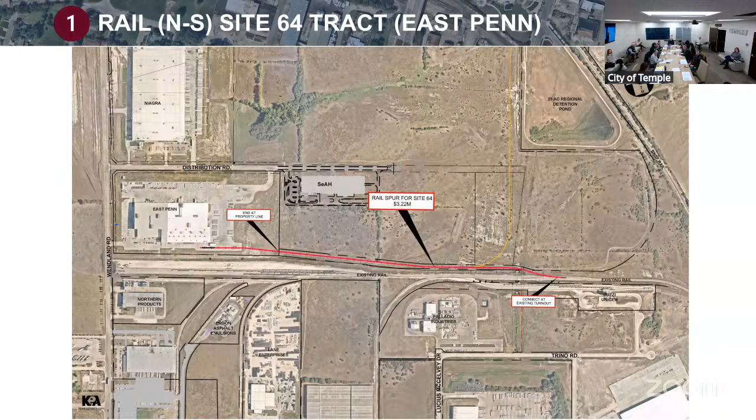We really just got that last week as we were trying to look through all the projects and find some additional money. So if you remember, 3.2 - it's actually 3.5, because the 308,000 goes with it. Yeah, so 3,528,200.

David, one thing as I was going through all these slides is that what we can use is, at the end of the slide, explaining the fact that it can be pushed out, so that when it's up here we can say that. So give me in red on each one of these as we go through, making sure.

I'm sorry, I was with my mother-in-law for her 90th birthday in Palm Springs for the last 8 days. I landed at 7:30 yesterday, and right now it's 5 in the morning, which can't be good at 7 in the morning. My brain is still in Palm Springs, which was 80 degrees when I left, and you're waking up to 15.

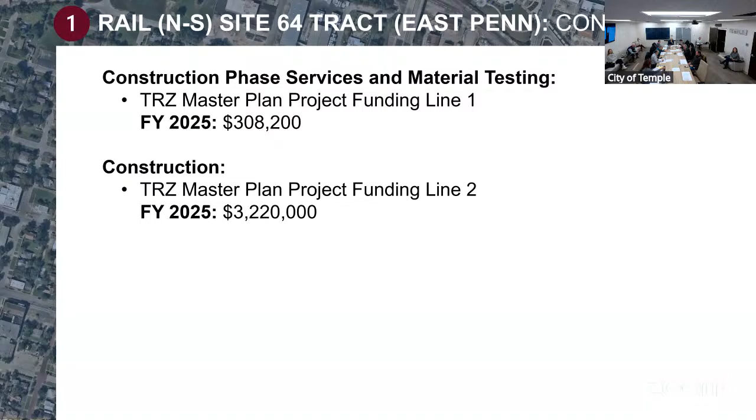That's not very fun. This is one big chunk of money that we really just found out about in our last TRZ planning meeting, which has helped free some dollars up, right? The master plan - we've been going through a bunch of this as a master planning group.

Another caveat, and I think most of us know about it, but in case you don't, is that there are multiple EDC land contracts currently on the table. So one of the things we're also looking at as a project group and a financing group, and want to present to the whole board, are some scenarios. If the land sales do go through, what projects would we want to have prepared to push forward.

As you know, one of the projects we currently have is this master plan. More importantly, in the master plan, the Old Howard is being moved and upgraded, and water and sewer into this project is being upgraded and prepared for the future. So that's also something we're going to be able to possibly complete.

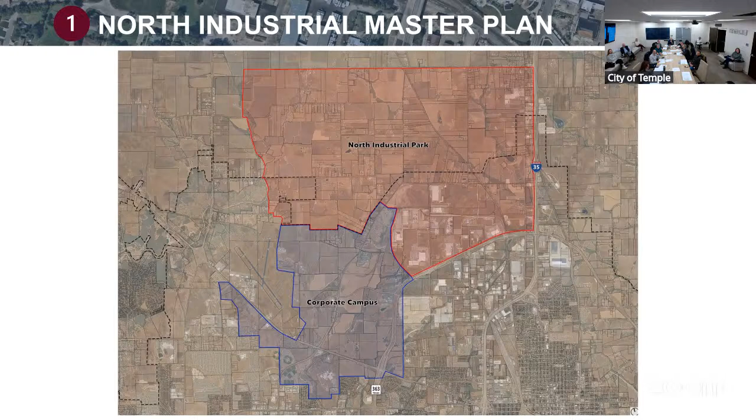Those are our two planning groups, bringing two of our zone groups together. It's important for everybody to see that we're looking at the orange or the red at the top as a planning area, doing a bunch of work in the master plan. We're really close to being able to make that full presentation, which I believe is an additional 25 slides. We didn't put them in here yet, but it's a very huge package that lays out what we're going to be doing.

The actual master plan is nearly complete. We made some adjustments to that master plan that I look forward to showing you all, just making sure we could possibly send this out to Patriot Rail to see if there's a possibility for them to get some grant funding for the N-S tracks.

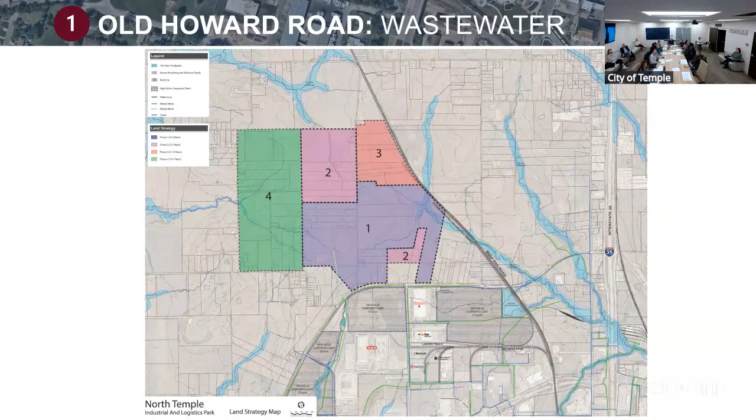Can we go back a slide or two? Right, so lines 33 through 36, which is Old Howard Road, water, wastewater, drainage. That's just that first green line, the first section, right? Yeah, okay. And there's two sets of slides here, and I've got to decide what's the best way to run through this.

This is actually just talking about a particular project, which was the master plan. When you get to those actual slides, it's nice for us to have a discussion so that when you get there, they begin to make sense. So here's the Old Howard wastewater within the master plan as we're pushing forward. This is just the wastewater portion of that project.

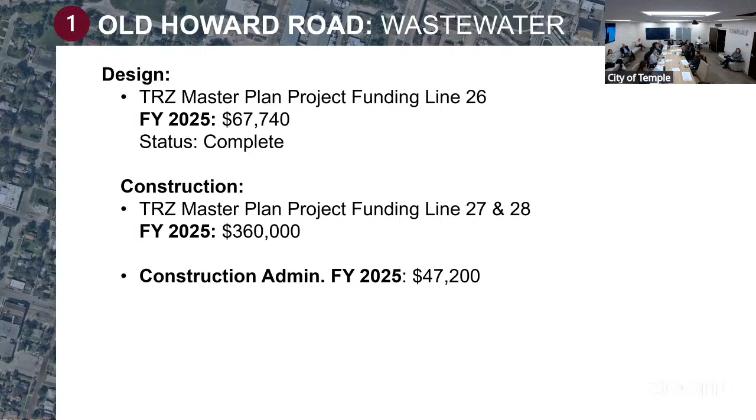But Gary, to your point, this is what is funded. That is what is in our project, and I believe we don't need any changes to it right now. The numbers are good, and so that's all we've designed is that.

In real terms, we have nearly all of the right of way available to push this all the way up to 1237. Again, that's important to know - we have a master plan, we know what we're going to do. We now have secured the land, and we've only designed the construction inspection dollars for this section.

But because of the amount of traffic we're going to put on this road, because of what's happening in this corridor, because of the really unsafe nature of Old Howard intersecting right at the tracks at 1237, we think it's important to try to release all the way out. This is the entryway of Old Howard.

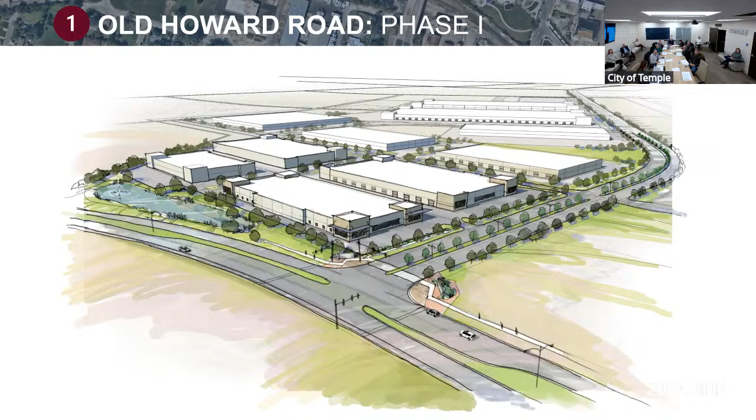We'd already made some adjustments to make sure we could do the landscaping, a nice entryway into this. That is the actual layout with some buildings in there, just to show everybody what could happen in that corridor - again, that's just another pitch. You were just talking yesterday at TEDC about the entrance and landscape, and that's programmed in. Yep.

This project's a $12 million project, 90% complete as far as our design. We're good to go on funding everything. All we gotta do is get the plans completed and push forward. I think 90% means it's in the city's hands. They're reviewing it, once they sign off, we'll do the 100% bid. Looking for a bid.

We're still waiting on Adrian to finish his deal to fund this. No, it would not change that, is my understanding, unless you guys have been doing something the last 8 days.

You can't talk about it. I think, I guess the question is, are we ready to roll? I think I would confirm with Adrian, but okay, keep going from there.

So if we're good, when would the bid date be? Where things are good, yeah, red at the bottom of this. I'll talk to Adrian, I had talked to him twice. Unless something literally has changed in the last 3 days, I think we're okay to bid, I think. Okay, but I would confirm with him before we...

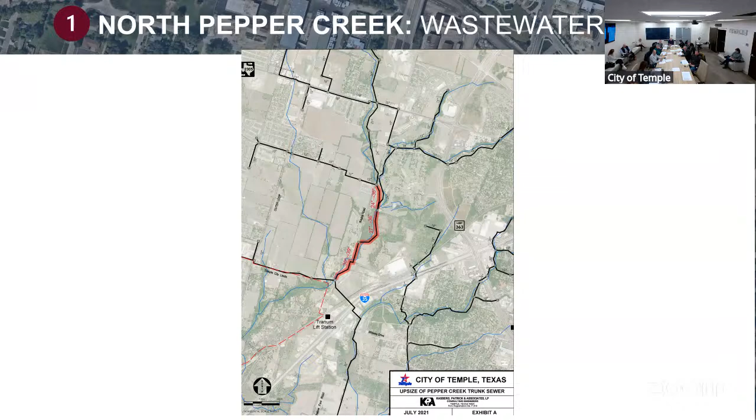Design's complete. We were ready to release this for Meta, and we found out that I guess Meta and Ocho both needed that wastewater. We don't need it currently, so we pulled the funding for construction to use in other areas, but we do have the plans, right-of-way, everything to do this project, and it is sitting on a shelf. It's very important for us to know it's sitting on a shelf - that is a choke point. We're going to upgrade that as soon as we really need it and have the dollars available, but it stays on our slides because it is something we're gonna need to do here fairly quickly.

A project that sort of jumped out at us is the sewer line requirements from, on the left side, Niagara - it goes to the railroad track, and then there's another section from the railroad track over to the lift station. This one, I had all kinds of questions on, I'm not sure we're gonna be able to answer them here.

The issue was that the current line there needs to be upsized. Bryn did a heck of a job pulling everybody together. I think a number of us in here were at the meeting. I think we have a roadmap to it. David Olson, I just saw these numbers like two days ago.

So the railroad, the Troy lift station, I don't remember us talking about that size of a number. I knew the one Niagara to the railroad, that was a number. I think the city staff absolutely has their hands around this project.

One of the things the city manager wanted to make sure of is that if we do this line for the third time, that it's the last time. So we're looking at all options to maximize the amount of wastewater that line will carry.

Niagara, if you remember, they were just going to do water. From them just doing water to where they are now, they put in two aseptic lines and probably will have a third. Therefore, there's considerably more wastewater, so we're going to have to upsize that line.

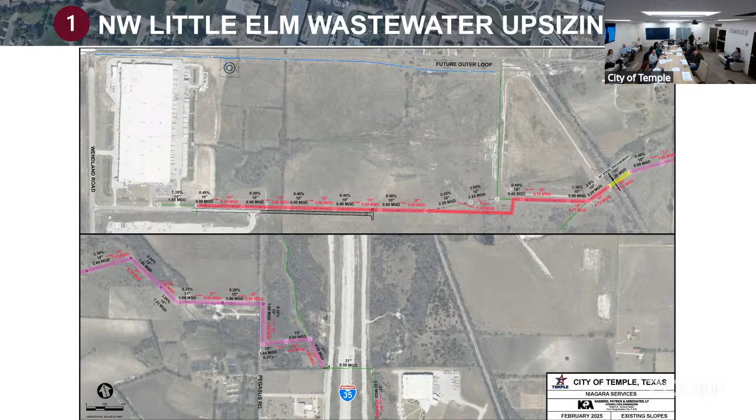64 and those branches, like the LEO 1 that's going up. Because everything, LEO 1, LEO 2, and this line all come together and go under I-35, so we're gonna have to get all of that capacity. Got it. Correct. That's what'll put you over the top.

Was line 44 still the correct number? Yes, currently. Okay, yeah. And that's our portion of the 3 million. You got city paying $1 million, zone paying $1 million, and Niagara paying $1 million. But we're gonna reimburse their $1 million, right? That's what current discussions are. So we're getting $1 million loan from Niagara, basically. Seems like an interesting way to do this.

Where's the reimbursement? I think the way everyone... Gary, I think the discussion is that if you look at the amount of increase that they have done, and they didn't know it, nobody knew it. They went from a water line to 4 lines out there, which we're delighted about, aren't we? And their investment and the dollars are returning back to us. We're doing a kabuki dance and thanking them. They're a great community partner. That's a great project.

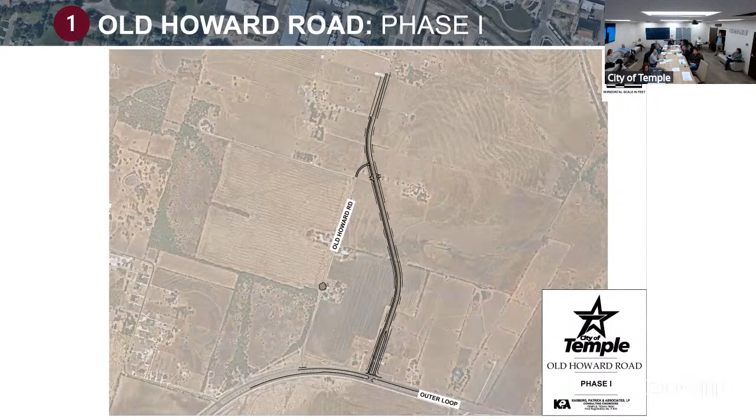This will be good, you guys, the 5.5 is an important zone project because the amount of capacity it gives us, if you go back for this project right here, that's LAO1's coming up into there. If we do a bunch up into this area, that's gonna drain into LAO1, and LAO1 and LAO2 are gonna push together to where all this water or fluid goes, see, they're all hooking into that, that's why, that's that one.

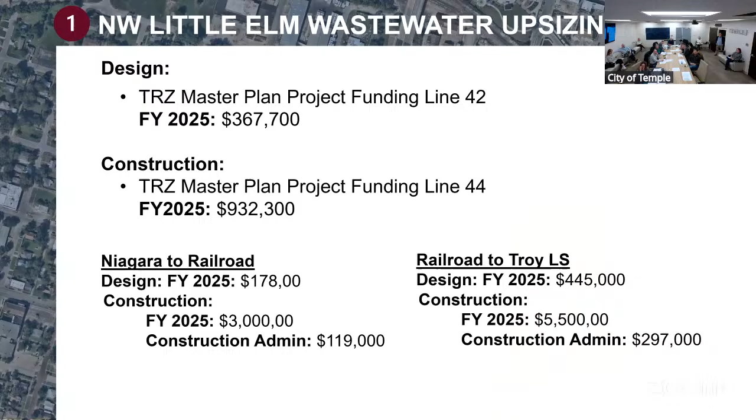Now we're moving to Crossroads master plan, not a bunch here, except that it's completed, and also it can be given in a presentation fairly quickly, you guys.

This Crossroads master plan has been slightly updated and is part of the North Industrial Park master plan. We'll probably try to get this sent to you guys to review, but we didn't add it all in because it's a considerable number of slides, crossroads.

But these are all projects that we've all seen and wondered, is there dollars for these? These contract amendments are usually us saying, can we add this kind of project? That's spending funding, we're still not funding it. It's a nice project to fund.

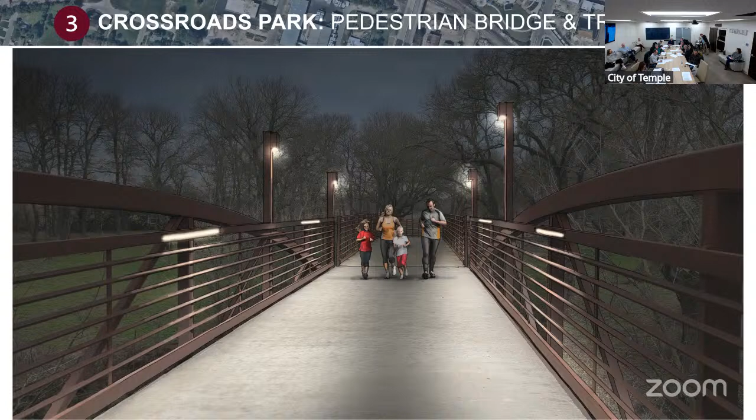We had it funded for 400 to just do one bridge on the Old Howard side, the outer loop side. We decided, let's go look at the whole project - what's it going to take from Old Howard over to the 2305? We went from our 400 to, I don't remember the number, 1.7 or 2.5. So we increased the amount of work, therefore we can't fund it. That's my opinion on that one.

This is we had a master plan for the crossroads. We've helped just do an update on what's a good thing to do with this tract of land.

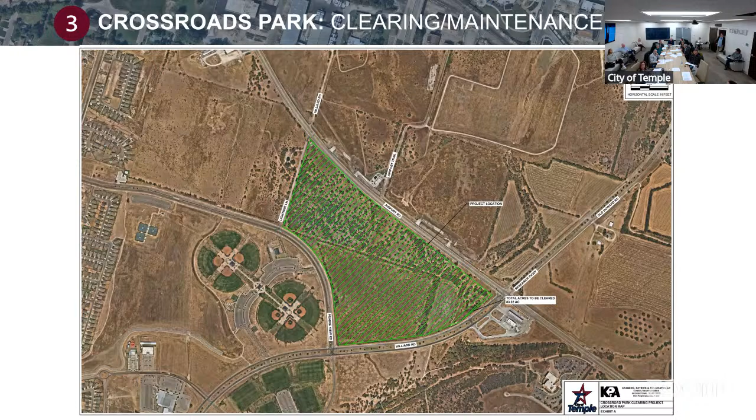Really what he's talking about here is that currently we need to open this up, or it needs to be brushed - there's a dump in there. What's the bid? It's already advertised, pre-bids today, we get bids in a month. Orange is heavy duty work, yellow is just getting mesquites out, and that's how it was presented so we can get this thing opened up.

We've got multiple people really looking at this, we've been in a couple meetings on it. I thought we might have had a slide in there showing what the potential is for this later on. Am I dreaming? You're dreaming, but I can add it - it's not in there yet. I'll stick it in after this, just to sort of show it, because it's part of the master plan on what we could do.

Are we clearing all the way to the corner? Where orange is heavy and yellow is light - so everything in the orange and yellow. But the corner, she's saying that's where we can't get in - all the floodplain. That's what gave us that.

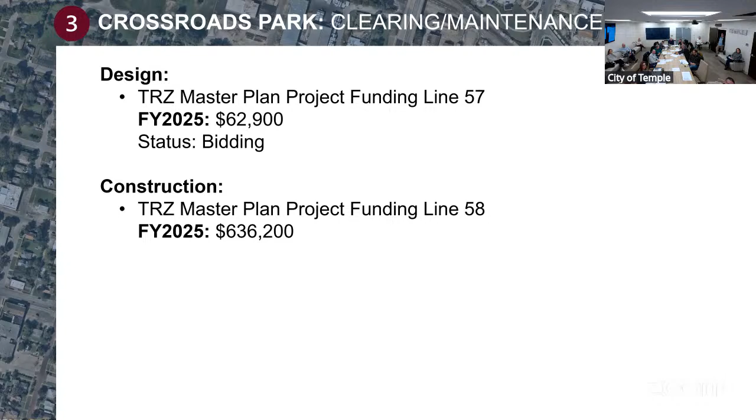Crossroads clearing, that's that project - you guys, nothing additional needed on that. David, why don't you take this one?

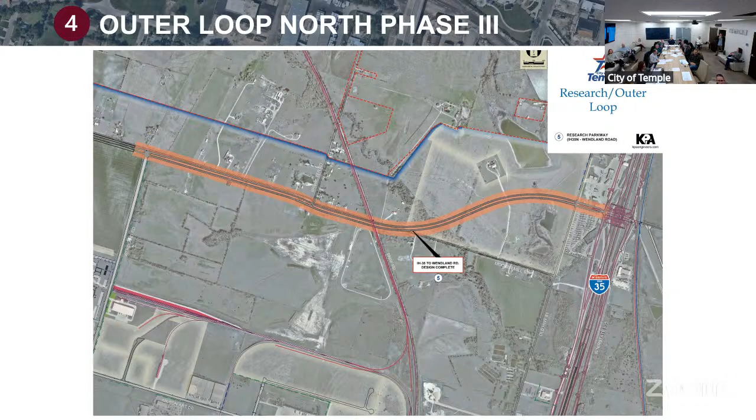Outer Loop North 3, some project we got rolling. This is the one - if you haven't been out there lately, we'll probably have a drone video pretty soon. It's going pretty well, especially on the west side. The bridge is going along quite nicely, piles going in, beams have been set on the west side across the railroad, and all the culverts on the west side are in. So west side's looking great, about to shift over to the east side of the railroad.

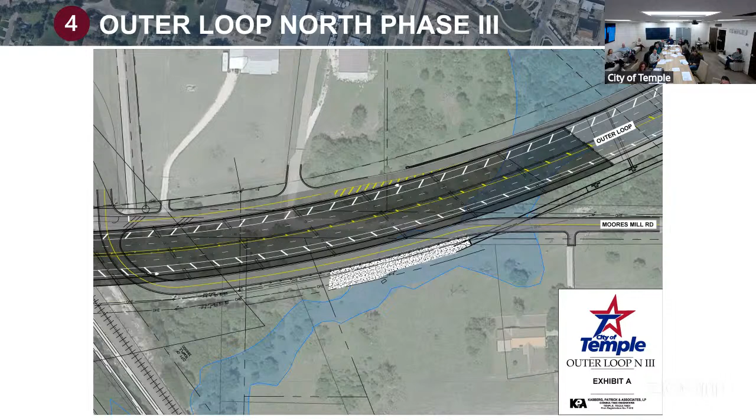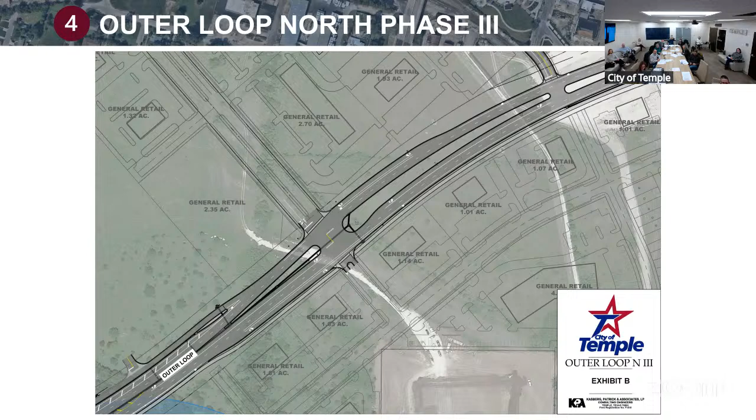As you recall, we did have some changes on there with the creation of the North Industrial Park Master Plan - good changes to this project that'll help us develop our land around this infrastructure and get us more increment out there. It was a considerable change order. Here's the exhibits illustrating retail and development that can occur once we implement the change order. And we do have a pretty good asset with that existing retention pond out there, and potential for a park in that area, so we're helping to create that and make those connections with the project.

Change order - this kind of gives you a high level look at that with the adjustments where we've got. We did have some dry utility complications and Pendleton waterline complications right there at the railroad.

With Meta, some very quick fiber optic lines were put in to feed that facility. We did get the plans for them and put them in our plans. When we started potholing, we found out they didn't really follow the plans. So instead of ripping out those fiber optic lines and shutting Meta down, we had to make adjustments on our set. So we've done that, and that's this change order.

We did make some adjustments at Brewster with the development of Site 40.

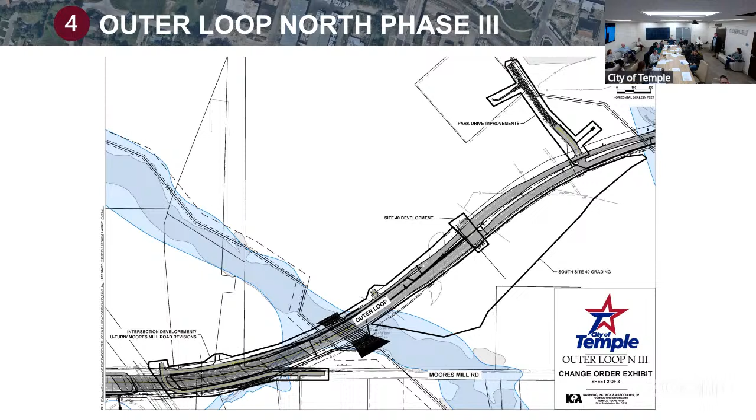On those fiber optics, that's all over town. Right in front of Crossroads right now, they don't really have to hand in plans or do anything, they just go out there and dip away. It's happening, they're contacting us on a bunch of it, and some of it we don't have things done yet. It's Meta, and Meta's literally telling them, put it in the ground. We got to rip it up and move it. We will do it, we'll pay for it.

Is that in TxDOT right of way that they're working, or ours? It's really ours. It's crazy because they can go through, this is wasting our time, but for having a Crossroads, they go through, dig everything up and leave piles of dirt everywhere. They don't put the sod back down. We go spend a bunch of money to make it look nice, and they just blow through and say, hey, we got the right of way, see you later.

So if we got change orders, are we asking them to pay for it? They have the rights, I don't know. Richard has his hand up.

Oh, hey Richard. Hey, good morning.

I just want to add that most of those fiber companies do submit a request to us for a public works permit, which we don't issue for work in the right of way by the franchise utilities. But we do review them to see where they're conflicting with our utilities and our capital improvement projects. And this one, they went through the right steps, they just didn't follow their own approved plans. But we do see them.

And that's, to Richard's point, not uncommon. A lot of times they'll coordinate with us, and whoever the entity is has done a set of plans, we've coordinated with the project, and then the contractor gets out there and they're usually before us. Something's in their way or it's deeper than they think, and they just kind of do whatever.

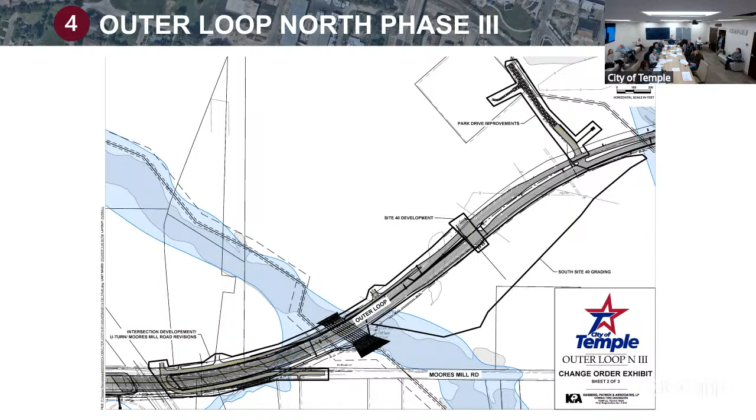With the QuickTrip development, we did have a few things that came in here, and some Pendleton water line adjustments. Those are included, as well as a water line extension that will go to the interstate and add a fire hydrant in, that was at the request of the fire marshal for QuickTrip, so we've added that in as well.

And then the change order amount is finalized, all of that. $3,520,000. What's your available funds for that?

We only had our last financing plan amendment, we had added a new estimate. So a proposed one, we would only add $241,717. When it comes time, so what's available and what we're asking for, so that we don't have to explain it in the amendment - this is the change order, but you have a certain amount of money.

Yeah, I mean, I guess, but we run out of contingency at that point. Right, so do we want to backfill it? We have worked some numbers where we would add $849,000 to the contingency.

Earlier I misspoke when I said it wiped out the contingency, but we would propose adding $849,000. So we're talking about adding 800 and not 200 - 200 for the additional change order, and then add 849 to the contingency, to give us a bumper.

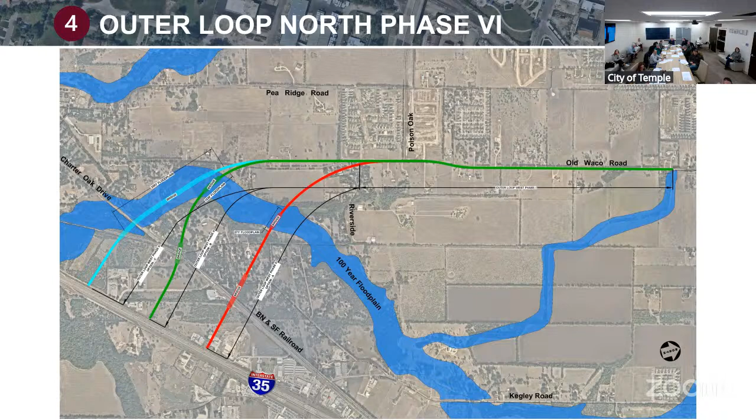Then it comes to this slide, and you're trying to figure out where we are as far as a zone. I thought we were right of way only on phase 6. Originally for 6, the zone was doing design and right of way. We've had some changes that will affect the cost and time significantly. Is any of that reflected in this slide?

Right now, our current number is 330, that's our current funding plan. With that current funding plan, is the project moving forward or dead in the water? I am currently rewriting a proposal based on the new scope of work and connection. In my opinion, this is a confusing slide, and nobody knows any of that yet.

At a high level, what's the— are you here until 9:30? No, I just wanted to make sure. You just whispered in my ear about pulling the parachute in about 15 minutes. So if we're not even going to get past slide 13, that's— are you here or not? I'm here.

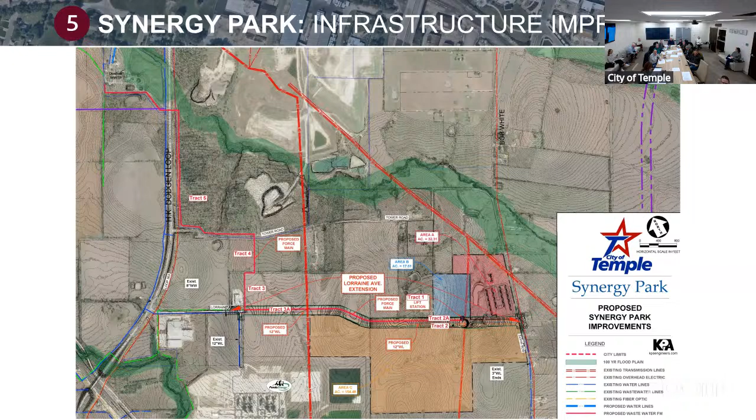This is some water line, currently under construction, started on the punch list. That means it's up and running, helping backfeed that whole area—Power Road transmission up to that lift, up to the elevated storage tank in the top left. That's a really important project to get water into that corridor. This transmission line—

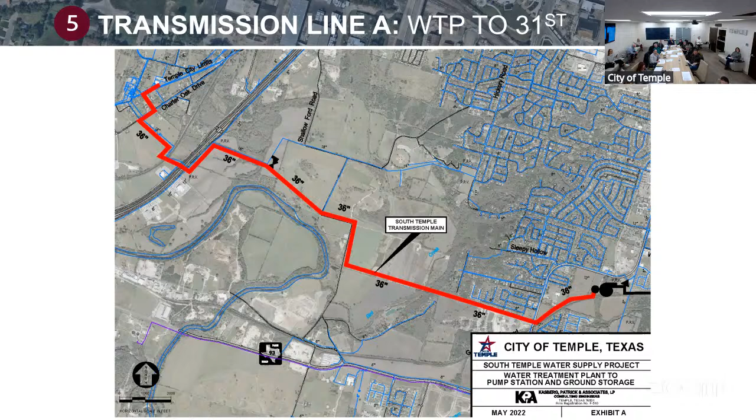I think this slide would be better to start with, David, than to start with the pieces. So I'm sorry, when I went through this one while you were talking about it—you should get rid of that first. Yeah, I think so. There's too many slides.

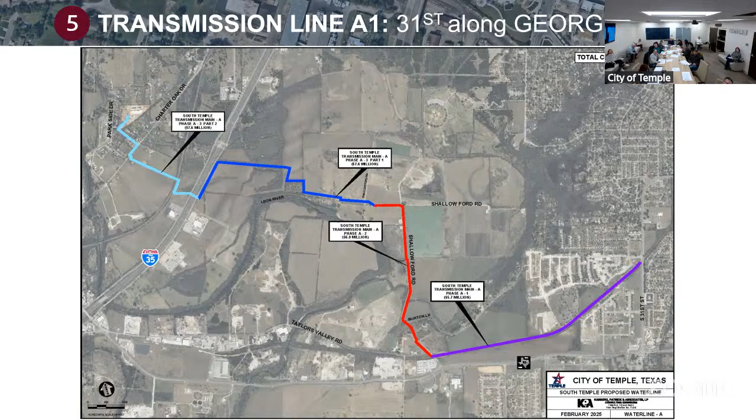We need to get the water from the left-hand side, the light blue—that's the water plant—to the right side, over to 31st Street. Let me check something out here, guys. I've got a lot of slides here.

So anyway, let me regroup on this project what we've got here. The purple is what we're going to try to release now. We're looking at the projects that are easiest to release so we can move forward. The blue line is the hardest. The light blue to the left is fairly easy because it parallels a current line.

So we walked ourselves through this. That blue line in the middle has probably got the most complex amount of right of way we've got to buy. The purple is all along the railroad. A good portion of that red doesn't require too much right of way, picks up maybe 1 or 2 pieces.

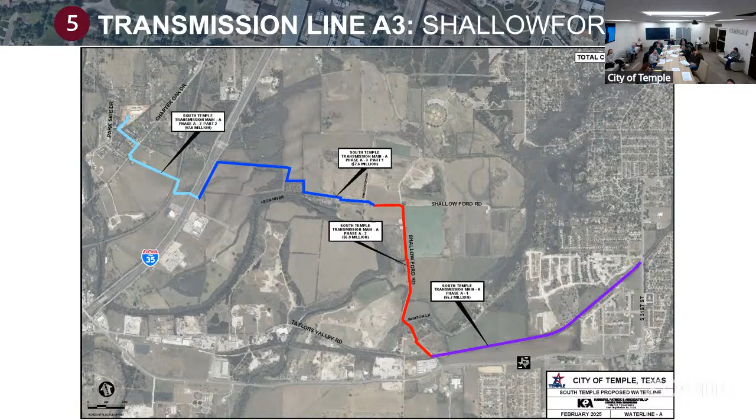So we can do purple and red fairly quickly. As the dollars become available from land sales, we're going to push forward on the purple and the red. While we're pushing forward on construction and buttoning up the purple and red, we're going to be working on getting the right of way to the blue so we can take that blue and then the light blue, attaching it into the plant. If we can get all of that in the ground, ready to go, you can then energize this pump station.

Which is along the piece that just got completed. We completed from 31st to 5th. It's been tested. It's in the ground, dry now, ready to go.

We pushed this ground storage tank and pump station off. If you remember, it was on our list to be done before all those other lines, but it makes no sense. That's one of the last things. You don't turn that pump station on until you can hook it into the elevated storage tank. So it'll be the last part of that.

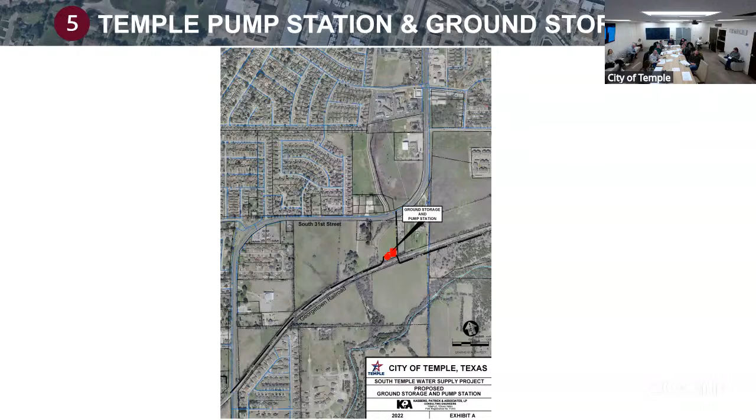I'm going to try to reorganize those slides to make that easier to explain and not go through each one of these. It would be nice to have a single slide that shows me the total lines rather than going through each one of these. A single slide would make it a lot easier for the discussion. Each one of these is multiple projects on our lines.

It's going to be real important for us in our February meeting. The important thing for the February meeting is to say, here's the whole line, here's the whole project. Red, purple, blue, pump station gets us to the elevated storage tank by '28, and we'll show you the funding lines on each one of those. And David's...

On each one of those, you can see FY25's design, so he is designing all of those to go get that water lines done. We'll blow through that, I'll make that easier for us, but I think everybody understands that. As you can see, some pretty big dollar amounts. But it'll make a lot more sense when they're all in a single slide rather than 12 slides for our purposes in February. Is everybody okay with that?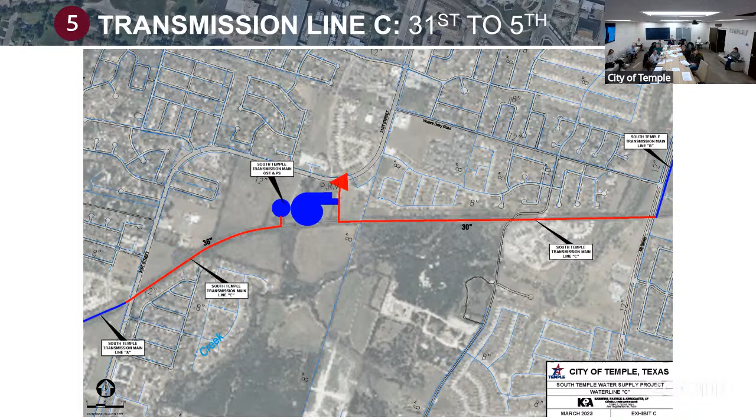You all understand this whole line, right? Pretty good, yeah, good.

So now you're back to here. Another slide. Yeah, this would be put in with that other slide.

That's why I was saying, a little bit of this, the water line, I'm gonna clean up for you, and the Lorraine Drive extension and what's happening in Synergy Park, I'll clean that up too. They're released, no change orders, nothing really needed right now for our February meeting, but I do want to be able to explain this to the full board in a little better way than what I am right now. There's just so many slides.

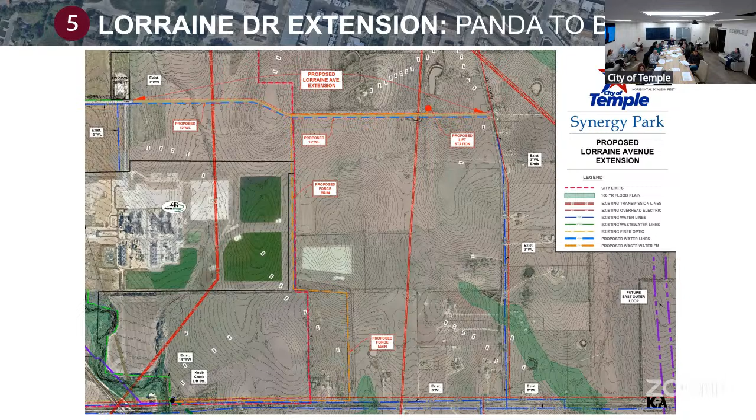When do we think Lorraine is gonna be done? Spring, yeah, spring of '25.

This is an important slide, but it's more - kill the other one, I guess, and just put it back. You got it, yeah, you got that. Yeah, this is the most important slide, that Lorraine's there. But we do want to explain, in Synergy Park, that the water line, the transmission's done, but he's put that in, put the water.

And so you're going back and forth in the conversation, which he does by funding line. But I want to be able to talk about Synergy all in one group. Yeah, I'll kill the first one, and I'll just keep this - right, yeah, that way you're talking about the whole project.

The Lorraine dollars, were those '25 or '24?

That's why I've been wondering, Tyler, about the 850 on the outer loop change order, versus being able to take those dollars and use them currently for the North Howard project, which I think is in here somewhere.

What you're saying is we got contingency money. Well, embedded in the projects. Yeah, we got money out there. Well, we also have $2 million dry powder too, right? If I'm reading this right - 2 million at the bottom.

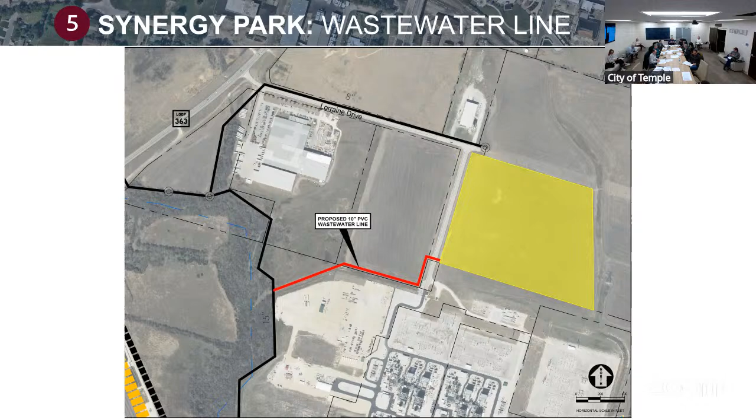You wanna show everybody what's in your financing plan and then say, okay, now let's get to the next slide saying here's what we could probably do. So then we have all these discussions that relate to the money, and then you get to it and say, now here's the money I still need.

This sewer line's going in, good deal, everything's there. You guys, this is a good slide. These are actually good slides. They even put that water line after it and that other one, right?

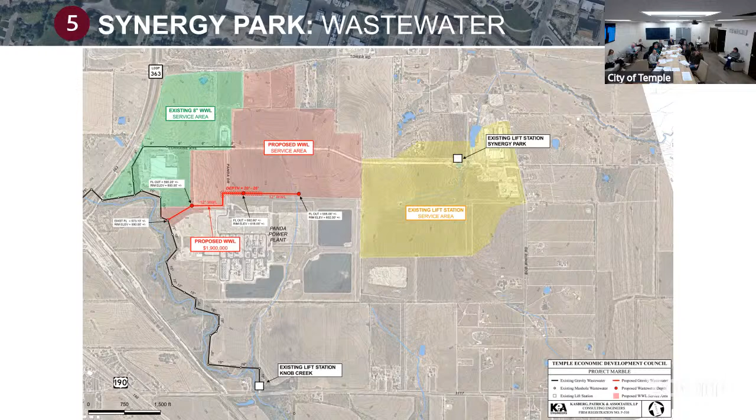It'll kill the first - kill that god-awful one that you can't really explain. This is the property, and this one could still be better as far as it shows what the sewer line services - the areas that are serviced. Well, not really, it does service...

Let's not talk about it. Synergy wastewater line, summer completion, under construction - that's a good project, needed. Downtown city center.

Man, I gotta tell you, my thought on this - I moved here in 1984. I have never in the whole time I've lived in the city of Temple come over the railroad and looked out on the horizon and seen all those lights on.

I've never seen that. I came up over and looked out there, you guys, and all of the Hawn lit up, and I thought, oh, I've never seen that - the whole top floor lit up. Have you seen it ever lit? I wasn't paying attention as I was driving over the bridge. Yeah, it looks pretty cool.

How do you - for me, I couldn't, you know, you look over that all those years. I mean, have you ever seen them lit before this? And you have? Probably. Yeah, we come down at night, but it's wonderful. Like when you're young enough to have seen them before.

Have you? Are you a Temple? I thought you meant - you've never seen it lit up before either. Not before now. Right, this is the first time you've ever seen it lit up, and been lit up in our life. I know, that's what I was wondering - who's seen it? Our generation.

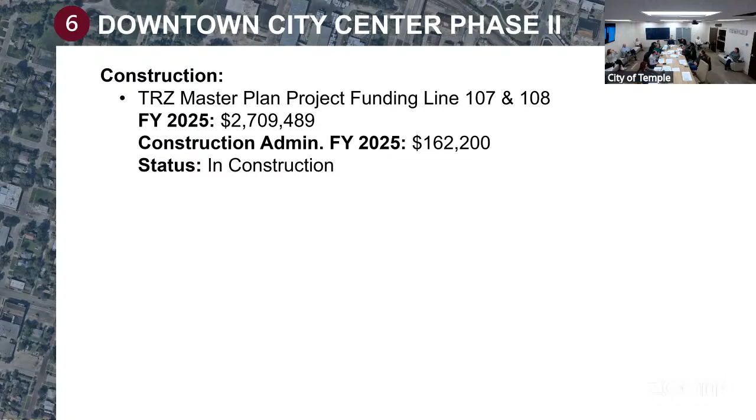It's crazy, lights, this is still working. Do we need any additional funds? Do you have enough money to finish this project, or the city, how are you feeling on it? That's actually going to be a Tracy project, but she's doing a great job - whenever we have a new phase, she magically finds money.

I saw that you guys contracted on one of the big yellow ones up there that you didn't have right away, so now you guys can go light that thing up too, maybe. And we're actively working on the second phase right now, or the final phase, and we're attacking it blocks at a time, and hoping that will work.

Really surprised that the one across from us here that's been redone, that's yellow, they don't... They came on board, that's good, that's an important one. This isn't - it's an old slide. Do you have an updated slide? I would need to check.

The question would be, do we need to talk about this at all? We say, hey, have you guys noticed that the lights are starting to pop up and it does look really good, and it makes you realize that any building lit is better than no building lit at the top. They look great, and that was the plan. We've actually gotten our communications and marketing team working with us, and they are making marketing materials that are being given to the outlying blocks, just so they can see, for those who haven't been down here.

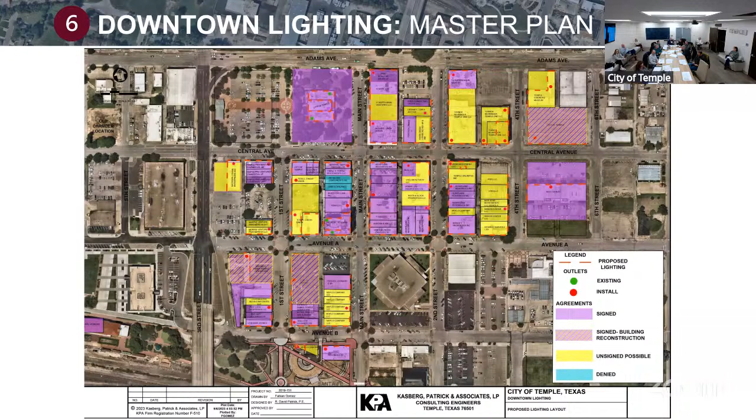You're still recording sessions? I'm okay, keep going with it. Keep going, just wanted part of the record. There you go. It's just so many things here.

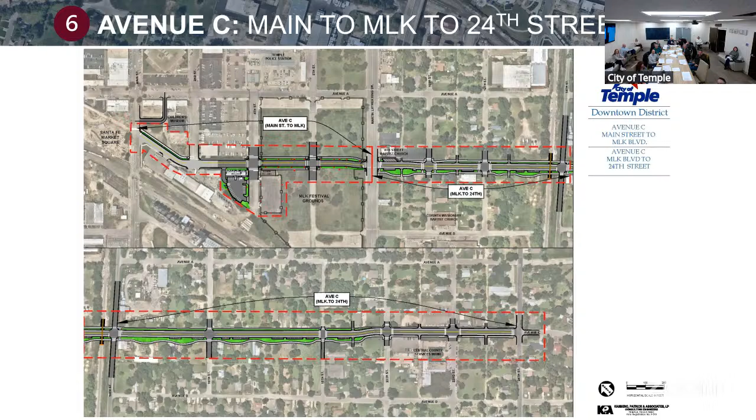Right of way purchases. This is, you can see these houses coming down and being cleared up. Do you have enough money for this? What do we have here?

Complete status. Main to MLK is completed, MLK to 24 in finance plan 2028. That's our construction dollars for 2028. Yes.

That was, if it's in 2028, we'll just get through it. C to Central.

This is a project that is coming up fairly quickly, 2.8, 2027. These are some of the projects that got pushed.

This thing's been ready to go. Matter of fact, this would be one of those that if some of the land closings come through, I think you'd push it back up, right? You guys, the design's done. This project is ready to push.

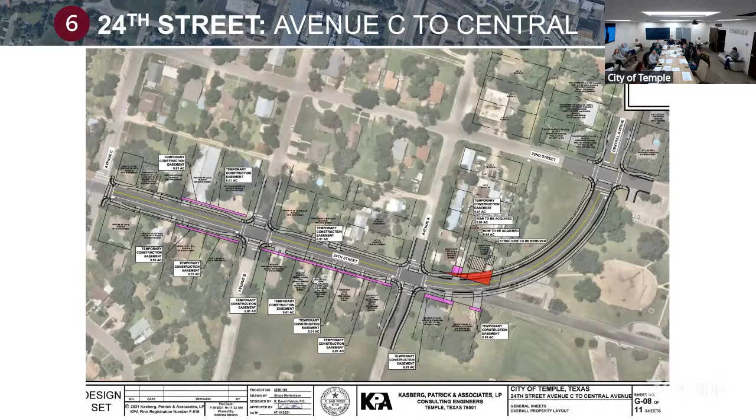We push the... back up one, or forward one or back up? Right there. What'd you say right there? Yeah, what you got?

Okay, I'm good. But I was thinking this is one that is really one of the projects on the east side that we should, you know, it's been ready to go. It would be nice to get it going.

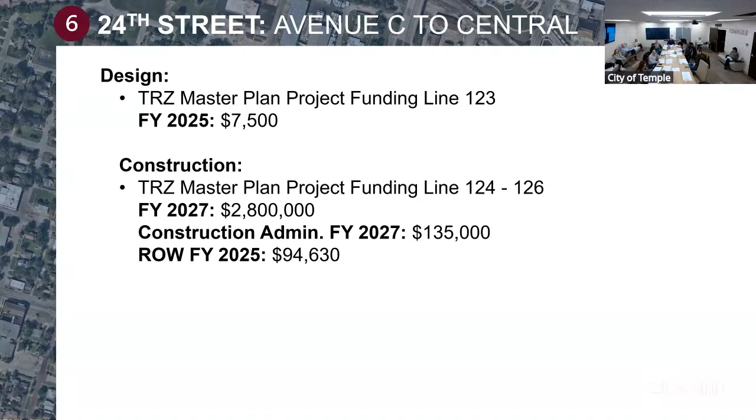This is Henderson. We were buying right of way for that. It's on hold from us as far as any construction dollars. So I don't know, I think Brendan picked some of that up in the city budget, right?

You write down, put 30% schematic, that's all we had up here. That's what we were doing. Because we didn't have to do right of way, we got it purchased or... there's a ton of right of way needed for this. All we were doing is trying to get them a layout for that particular project.

And we had a 30%, now I remember 30% said that if you could save more land in there, so that when it comes up, what we had decided is just to get this yellow line put on the ground and begin the process of understanding what it would take to do this.

I thought it got redesigned. You did, and it didn't necessarily eliminate it. Is this the redesign? I don't think so, we've all slept since that. Make sure you have a current layout. If not, at least put it on there.

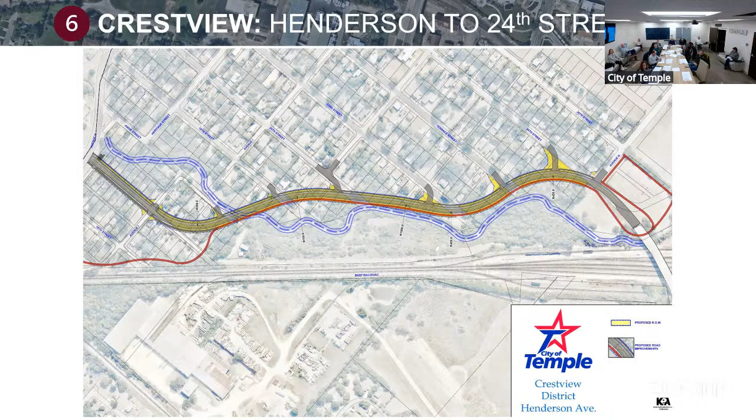Now, like Steve said, this is a game changer for that whole area. If you had multiple purchases in 6 months and you were looking at all of the projects across the radar screen, which is what the rest of these slides begin to do, it's to say where would the dollars be spent. So this is a project that is ready to bid.

We're trying to push David to get an okay from the railway. He was waiting for TxDOT approval complete before he pushed to the rail. So this thing is ready to go, we're just waiting on the final sign-offs from TxDOT and BNSF. The city's gonna just push. The school district just approved their GMP for all that work over there, so we've got all that funded. Yeah, this is funded, and it's ready to go.

But it's not going - either David comes back and says we're all ready to go, but we're really not, that's not solid. We got all this money and we're ready to go, but it's gonna take 8 more months for us to get it. We shouldn't have all these dollars sitting on the table, so this thing needs to release in the next month or so. If not, we need to push it. $5 million, yeah.

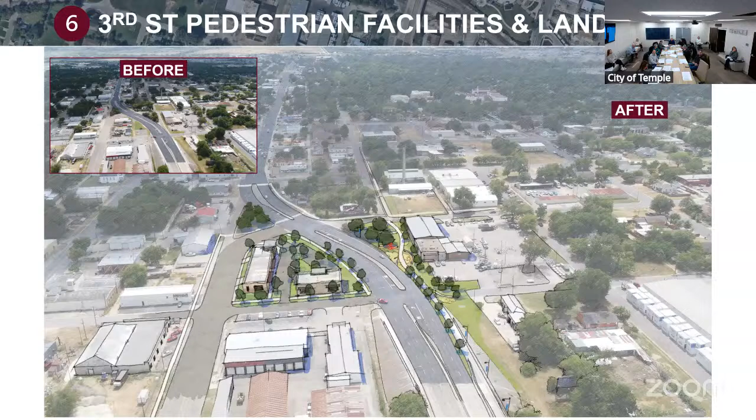So somewhere in here it says this is what they've released for their project, that's what it looks like. We were trying to make sure we were ready. David has asked the question, well, should we split this into the city portion, this piece? We could break that off so it coincides with TISD. Then this portion of the project pushed with the approvals for TxDOT - in my opinion, this should be ready to go. It's been on the radar screen, this thing needs to be ready to go.

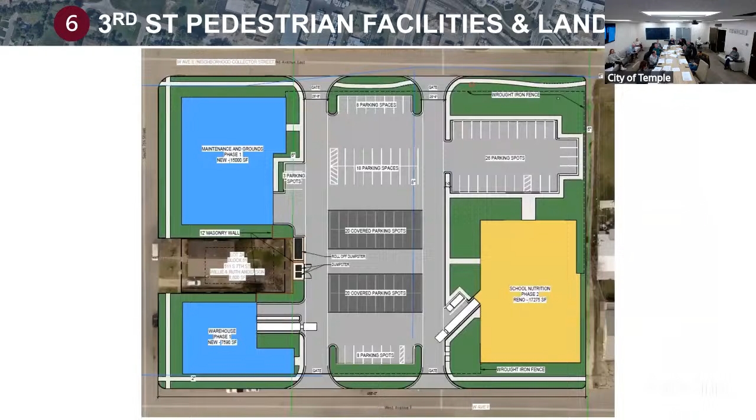So you're saying that's 2 projects, or this is one? This is a single project, all of this is in this project, but you could phase it. Because that's an on-system spur 290 roadway for TxDOT, much like we're doing at Veterans Memorial and jumping through those hoops and changing plans daily, you'd eliminate that for Avenue E, because it doesn't make sense - for Avenue E we had no control over that.

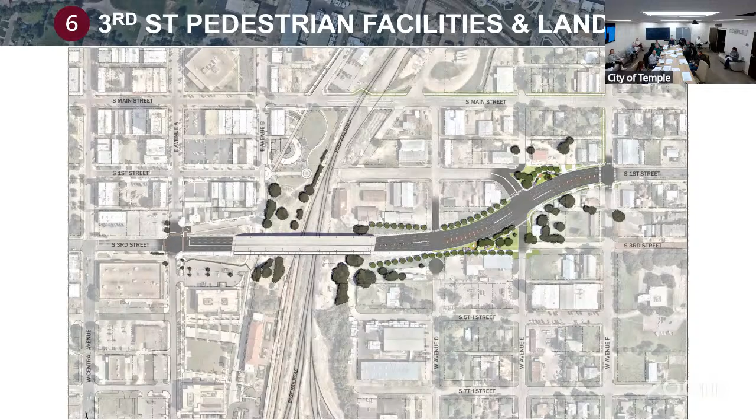And that was just a question - it's all the same, it just needs to be pushed through. We could easily break that out, just do Avenue E and take all TxDOT purview away from that piece. I'd like to get it all done - start with the process of just saying, what does it take to get this thing released in the next month and a half? We got the money, the plans are done, what's it take to get these 2 people to say yes?

It's so easy to just say let's push this back another 6 months because we're not gonna focus on it. The city manager and all of us, we need to get this done, it's been on our radar screen for a year. That's my opinion on this project, it's frustrating. This thing should be ready to go, dollars are there, TxDOT and BNSF, that's what we're in coordination with.

If this project needs to be relooked at, it won't be for February, but - who, Richard? Jason, he's working with Jason on TxDOT on it. Good morning.

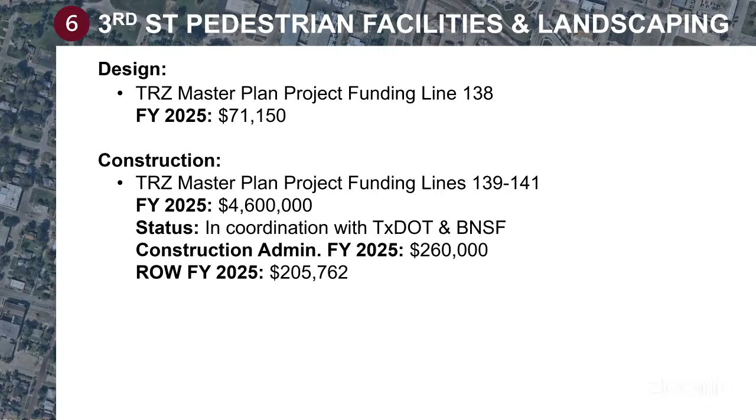Hey, just to let you know on that project, we have a resolution going to council at the next meeting for what they call the local on-system agreement, which is TxDOT allowing us to spend our money on their road. So that's one hurdle moving forward. Great, so we won't be readjusting this now - let's just get BNSF to sign off on it. That's David Patrick's show, I'll let him fight with the railroad. We are fighting with the railroad. When did they get it? We need to just be pushing forward on it.

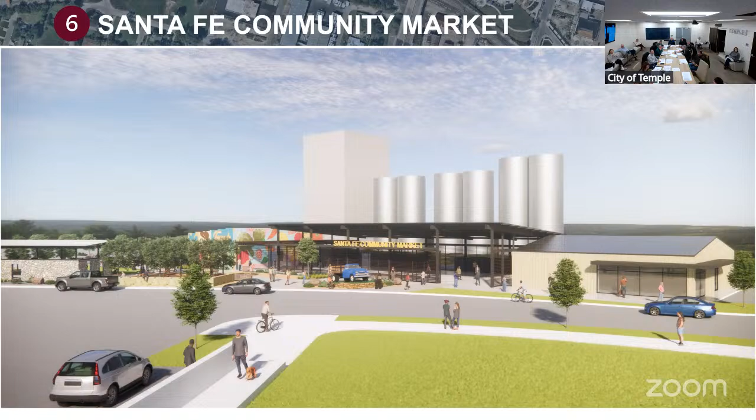This is a good project under construction. You can see it's sort of a moving target, but it's now really nice and cleaned up. This is the newly adjusted version. There's been some changes, as you know, to that performance building, and I believe this is what it is now.

That's not gonna look like that anymore. He has the new one. Remind everybody of the previous, and then we'll show the new. Oh, you got the new slide in there? Yeah, that was the previous one. There's the new one.

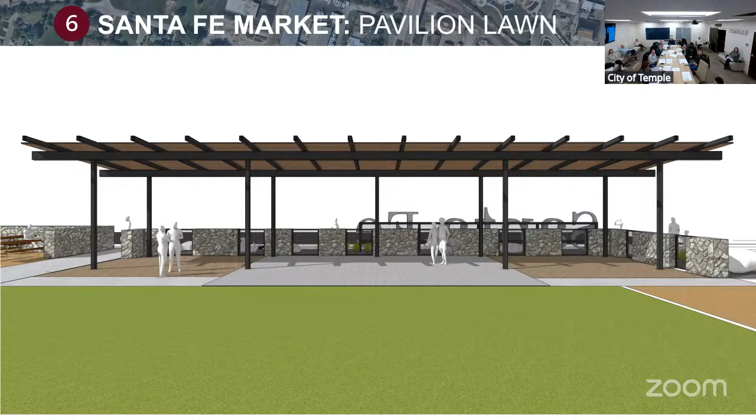Does that match the new one? No, that's the old one, just so I remember, the short one. We've lowered this, there was no foundation under that, so that was one of the work in progresses.

There are some letters that they found that they're gonna put in, that's part of the project. If you look in the background where the mural is, we do have that in the project.

That wall, we gotta make sure that they are doing as much as they can. It's a pretty big dollar amount we're spending to paint that. Let's make sure there's no scope issue on that wall, David, I don't believe. In my opinion, understanding that, you're talking to the contractor, but that's a pretty expensive mural to be put on a wall that isn't scoped out at all. So we either need to drop the mural or add some dollars to make sure that when you spend $60,000 on a mural, it's on a wall that has been properly prepped.

I think it's 40,000. We spent 6 on the one at our yard, and it's pretty big. Yes. That seems like a really high ticket.

I would say that needs to be analyzed at the project group level. When I talked to your group, we've gone and walked it. I talked to the architect, and the architect said yeah, we do want the little seat below, that square is there, you can see the door's still there, they still want it to look like it's on there. I said, so are you prepping it all, like power washing, scraping, and texturing, making sure it doesn't peel off in the first week?

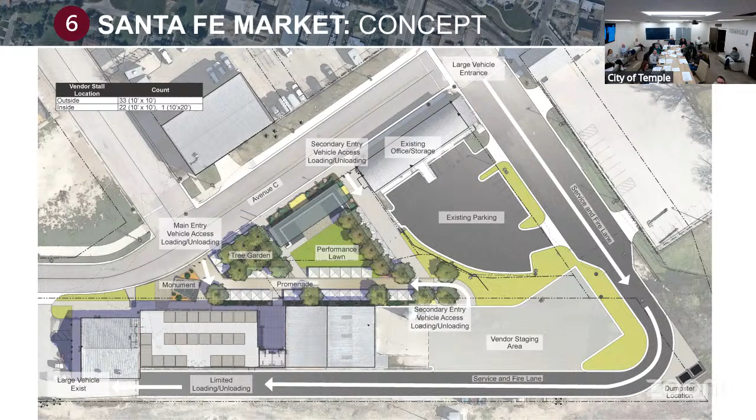Those are all kinds of thoughts, you guys, that we've talked about. The key is we're gonna have to do the roof, and that is gonna open and activate that building for storage. That's one of the deals.

The other one is, do you have the change order on here, David? I don't know, are we not having a vote on it? We have adding 450,000 for both to cover. Meeting's over, Chairman Strickland.

The drainage change order will be on your agenda for the next meeting. It's dated around 140-150, but I'll add it. That one needs to be on the agenda.

I'll add it. I'm starting to figure out how I'd make that presentation. We're going to talk about how this works - I need a slide that shows a picture of what we're doing. There are two items that need to be done on this: the roof, and I'll explain why we're doing the roof more briefly than before.

The other item is what they found underground. We had a nice inlet there for drainage, but as they opened it up, they found out the conveyance system for that inlet was all done with railroad ties from the old days - they ran the pipes along railroad ties. So there are two change orders, the roof and that, coming in around 160 and 250.

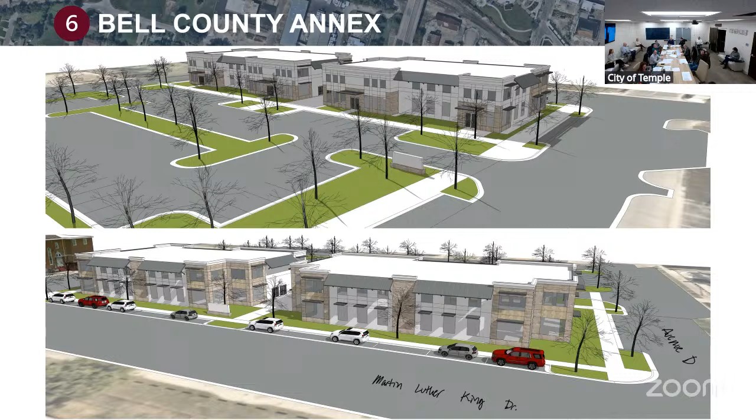You go through the whole story that they changed on the county level. It used to be that there was a single vote, it's real important, now it's a two vote system. And that's why Colleen's taking so long. That's what had happened. It used to be the person's district that made the change.

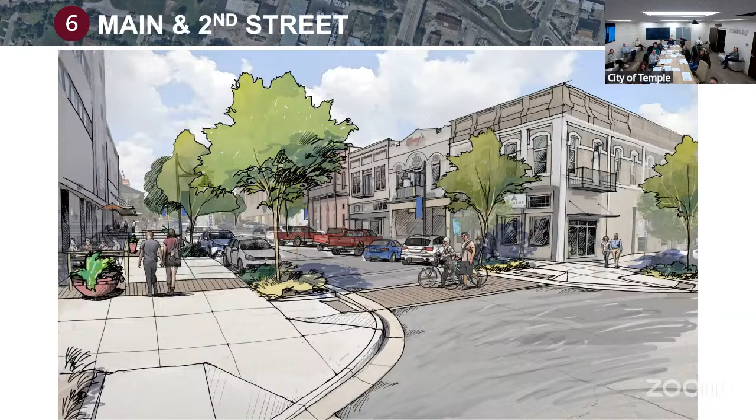This is the whole Avenue A corridor, Main Street, Second and Fourth. Let's see, you show Fourth and then you do not. Yeah, I've never really liked it. It didn't get in there. Not labeled, it doesn't show the same tree layout. Why it didn't put to there.

The important thing on this is that the actual design is completely funded. He is working on this. Design part of Fourth Central Avenue is being broken out as a separate project.

Does it show it? Do I have that as a separate project? So what you're telling me right now is that this Fourth isn't a part of that 360? It is, absolutely, yeah, I don't have Fourth. You told me 45 days and I'm just making sure I understand what this means. Design is in progress, yeah, so design is still in progress on Fourth?

There's no slide in this presentation that explains that, right? There is not, that's my point. It's not, I can't use this, right? Okay. When we're back at Central on that, I can't explain it in that project, so my point is that I want to be able to tell the story you just told me. Gotcha, you don't have it in here.

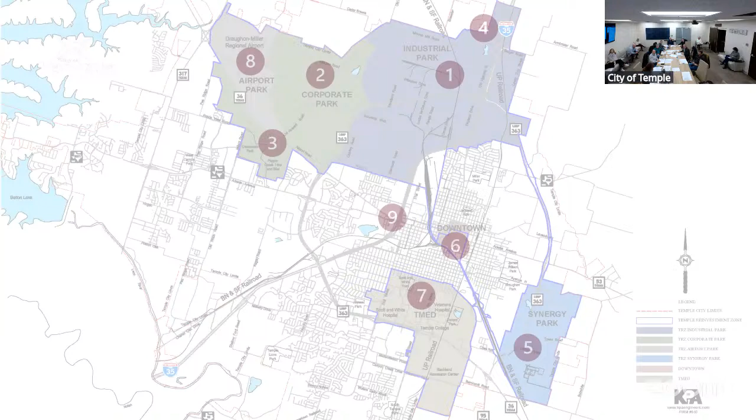This all done, right? Yeah, there's still money remaining, 301. Is that how much you have left in this thing? There's an item coming for some clearing, there will be some. Is it in here? Yeah, I missed it then. I don't know that he had it, but I think it's on.

May, okay, 26th. But like I said, I went through so many slides. Is there another slide that talks about that item? That's what I don't... there's no change, nothing needs to be done. Nothing's gonna be done in February then. You don't need a financing plan. We're good, everything's good to go.

When I show this slide, is there gonna be anything I need to say about the fact that someday Transform Temple is trying to put dirt and landscaping there? And that's gonna be on the council's agenda, or not on ours? Is it anything to do with us? Are we funding it? You're funding it. 300,000.

In 25. Just want to know what I'm gonna say when this comes up, I don't know what it's for. No, one moment. She's pausing us. So in case you might be able to sweep it. I think what you're gonna have here is a red line. Just get ready to say that there's an item coming, whenever she tells us that we don't need any more money, so unless she's gonna know that it's on the agenda.

So really, the 301 is what was remaining from the purchase, and we had it still remaining to be used for landscaping and irrigation on that center section. And at one particular point, that building number 6 down there was supposed to come down, but it's now a storage building rather than a nice cleaned up slab.

So we're talking about sweeping it as a financing plan amendment this time or no? No, I don't think we're doing that, I think they're gonna spend some amount of that 301. Yes, that's what I'm trying to look at. She's still trying to find it, but what we're gonna do is just, I will explain it. And it'd be nice to know what the number is, if it's already gonna be on our agenda. I think it's less than 100, or right at 100.

Well, the 200 is remaining because we just gotta sit in the park, because we're gonna take the shed down. But that same shed might be there for another 20 years, so we need to determine to spend the money. Yeah, I agree, pull it. Would've been nice, yeah. All right, okay, I think it's on your February 26th meeting.

Yeah, agenda, hang on. Yes, it is, it's for 93,000. 93,000, yeah, so we could pull 200. It's gonna be on our February meeting, so can you get that, or whatever that number is, to David, so that you can just put a line item on here like you do, that it's a voting item. Just make note that you're gonna put that.

Veteran Boulevard. I haven't seen it, but it's on, it's a run through. David can find it, she can send it to him, it'll be on there. Now, we knew that we were gonna do that, so it'll be a voting item when we get to that slide, that way we won't have to explain it.

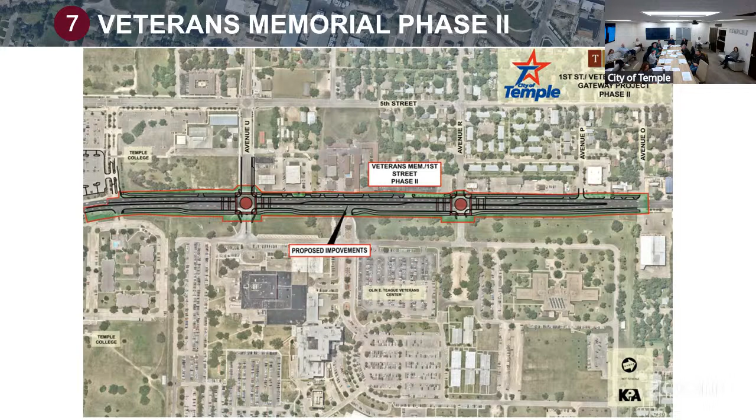Call Hillary, I'll call her. What, those unfunded mandates you're looking for? Unfunded suggestion - unfunded strong suggestion. I'd say that as long as they're funding it. They're not.

We're gonna say that this slide's still going ahead, and that David is working through the process of getting his approvals at TxDOT. Right now we won't say any of that other stuff - we really don't know. You're just working through the approval process.

Is it likely, I mean we've got a lot of dollars committed for 2025 - does that timeline need to be pushed out? It can, no - we got grant dollars. As of our meeting, we're still staying with this slide.

We have to award a construction contract, and to them, for their deal. So this is - we will run through these in that meeting.

One of the keys to getting this completed is the land purchase. Tyler and I are on that board, and so is Brian Hart, so three of us cannot vote. Oh, we don't have to vote on that - we're not changing anything here. So it's just, I can talk about it as a project, can I?

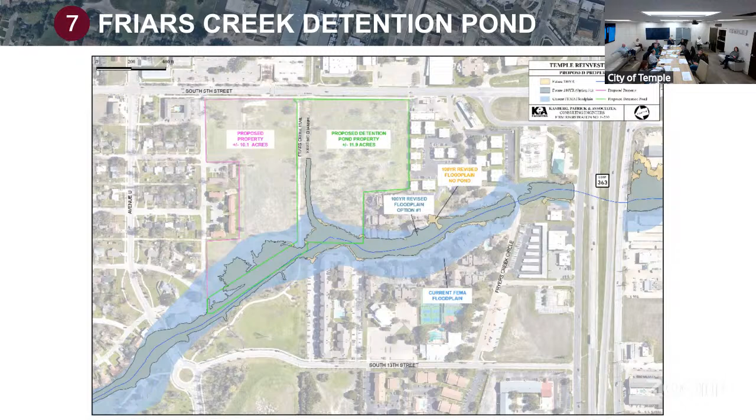Yeah, everything's been done. The bottom part is we're gonna have an EDA for the proposed detention with the bioscience district to construct that detention facility, and all the dollars are remaining the same. I'll be able to run through that real quickly - I won't do it now. That's all been approved, no adjustments.

It is broke off - the Friars Creek is broke off as far as the construction dollars, because it's not part of the TxDOT, but we need it to be done. Do we need to change that right away to a 380 agreement?

It's not a purchase. Yeah, and I think we could probably give the city access to the land to start even before payment's received. It's no longer a right-of-way purchase, it's more of an economic development agreement with the city and the DPD as opposed to a right-of-way purchase.

So do you want to change that out of 146? We're doing it as a 380 instead. So should we just say nothing? Do we need to say anything? The amount's the same, same.

It's just the documentation - it's not right-of-way purchase, it's an EDA. So we're saying we can go ahead and just change that ROW to a 380 EDA participation on the right-of-way for 2025. Yeah, I think that probably makes sense to have that done.

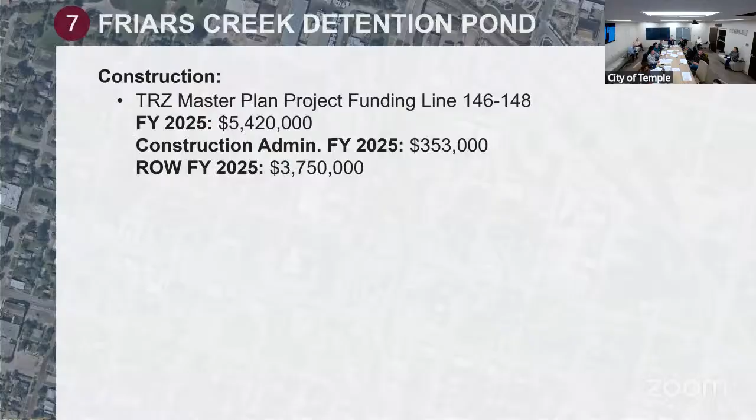Here's what I'm saying: when I go from a 7, that's my last item on number 7, and I come here, it doesn't tell me, hey John, you know what you're going to. It should take that 8, now we're going to the airport, because I think that's where we're going. So otherwise I don't need that slide.

You want to keep it though and just have movement? Yeah, I'm moving. Once you do it every time, you're announcing that now we're moving from one to the other, like, hey, we're over here now.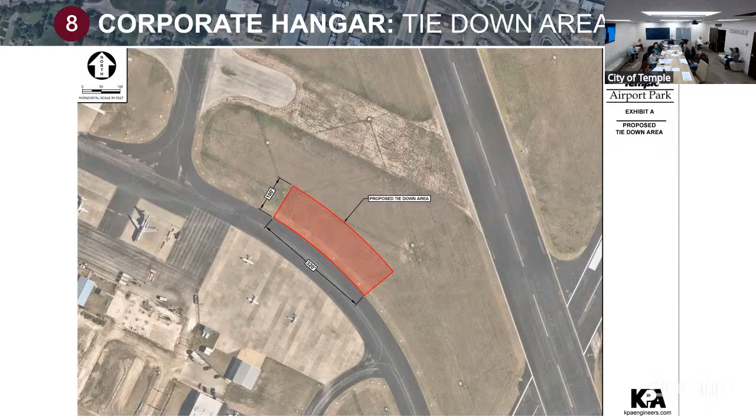David, do you have a better picture? I don't know if you can, in a week, but it'd be nice if you had an aerial that showed what we took away. This doesn't explain it. This is one of the grants that is happening.

I didn't really understand this one. We've got... that's the match dollars, huh? That's the match. Those are our match, that's all that's saying, but you got the grant match, it's our grant.

In 2025, we currently have 438,260 in there as a match grant. Those, and that's showing every other year. Is that what this is telling me? Those are two different grants. Okay, the 438 is the DM taxiway grant match, and the rest of them are ramp grants that we get annually from the state. So I'm trying to tie this slide to that slide, with the 438.

Is there an update on this project? Does anybody know? Can it get under one? He's about to release it. That's what Sean told me. We didn't do this, so all we're doing is funding the 438 towards this project, and the state's going to let that project.

So I talked to Sean earlier this week, and he said he was about to bid it internally. We're not doing it, so I'm not in the weeds on it. Do we agree that... yeah, it's a TxDOT. Yeah, I'm pretty sure.

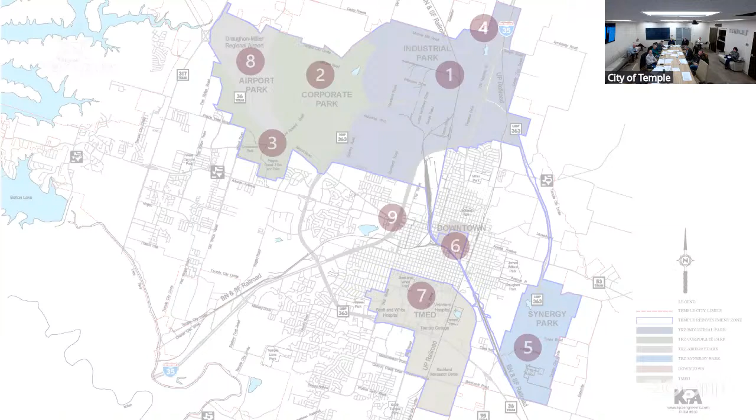And then we're gonna total it. Yes, that's what you need this to have. And you have those, Melissa? That's good, because the slides that I didn't understand actually ended up being ones that need to be clear, so that's always good.

This would be, I guess we're going to slide 9. See what I'm saying? That's what's confusing, you go to this slide and you think, oh geez, what am I doing? And that 9 should say, here we're going to whatever this is, the Eastway Gateway.

Don, I'm still waiting, I saw that you had to answer a bunch of questions on that. Is that ever gonna hit the paper? It's okay if he's listening. I was wondering if he's gonna say how good a project this is, because it is now complete. I've been watching for the article.

I've been waiting for the article just to see the twist on it, because as many people complain, I've had more people tell me every day how nice it looks. Unfortunately, people don't call City Hall to tell them, but I've had a ton of people tell me how important this is. There are more people that have come into our community recently, like NKF, the market analysis people, who said they had no idea what was beyond I-35 because it looked so bad. They pointed out they turned here to come down to our meeting and how great DDC looked. I think that's really important.

It's unfortunate that 90 to 95% of the comments we've heard are about how great this project is, but all we concentrate on are those 5 people who complain. That's always unfortunate, but it doesn't matter, just do the work. The paper has called all of us wondering about this. This project started nearly 10 years ago, and we've talked about it meeting after meeting. So it's completed and looks great. We have so many gateways in our community, and this was a great project to have done.

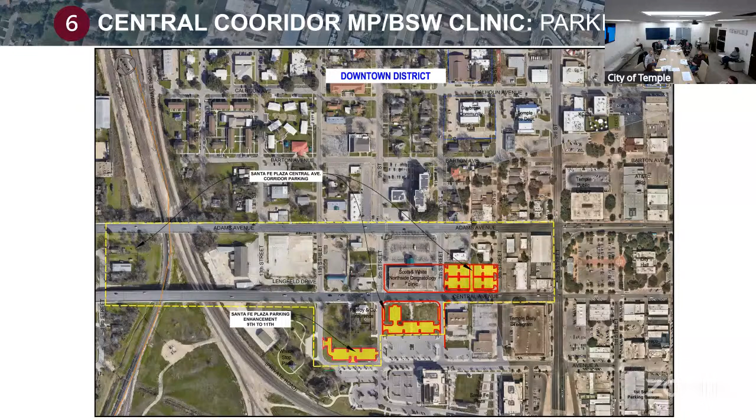These are somewhat in the order for which we do it. This is a master plan already being done through the city, and already voted on for Wilson Park. We agree that just like Crossroads, this could be looked at holistically, which is really important.

I don't think that's started, the master plan for Wilson Park. My understanding is it was. The proposal's been submitted in the area. Yeah, I don't know that we've got a contract on it yet though. I don't think so, did council? Yeah, we have a proposal, but I don't believe we have a contract.

Proposal for the plan. The only reason I knew that is Cody said Aaron had asked for it and that she had dollars for that, so there is funding there. Since it's there, we'd also like to put everybody on notice that it's important, and if it's zoned like it did with Crossroads, it would add this as a potential project.

Remember, everything we're talking about are potential projects. It's really hard for everybody to understand that you're switching from projects we've done to now giving the board a heads up that this is a project we'd like to do. Yeah, just another, we've now lost the project committee forum. You can continue to talk since you're not making decisions.

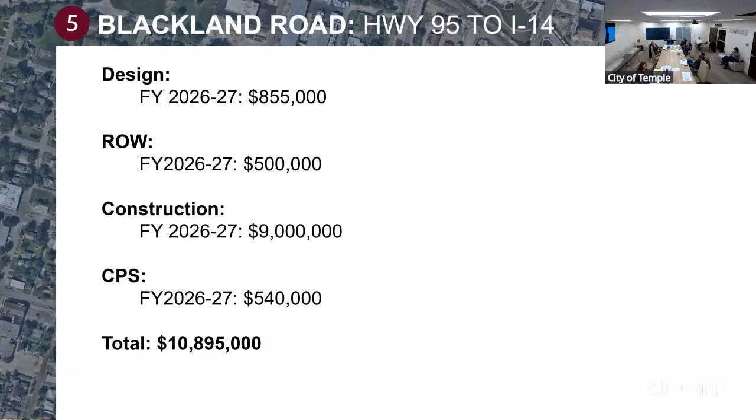So you're going back, and this is where you're going to one, right? Let's go back here, see? This is my last real slide.

When you do this, we talk about the fact that there's gonna be maybe a need for some additional funding. We're done with our financing plan, right? All our financing plan amendments are done and all of that. Now, the reason I went to this is because I wish I could -- this is a need, right?

There's money for that, I think. Yeah, to your point, John, I'm thinking through like, do you even show it, or do you just show like, here's the super close one, which is this one, and maybe some of the right-of-way stuff we're talking about, but not -- see this one? Yeah.

That one, I mean, here's your problem. You need that to happen now. I think there's a combination deal going on here. We've lost everybody, which is okay, so we're not gonna vote on anything. But what we're trying to determine is, we've lost damn near our whole finance committee too.

Do we have money for that 1.758? You guys, right? That's what we've asked Melissa. I think we should see if we got this 1.75. I think line 71, we can steal it off.

Personally, you got the extra time, Roland? Oh, Rowan -- that frees up. That frees up $5 million, but it frees up 1.6 today. Yeah, I said we might still have to have another meeting, Bob, between you, me and them to confirm how this goes.

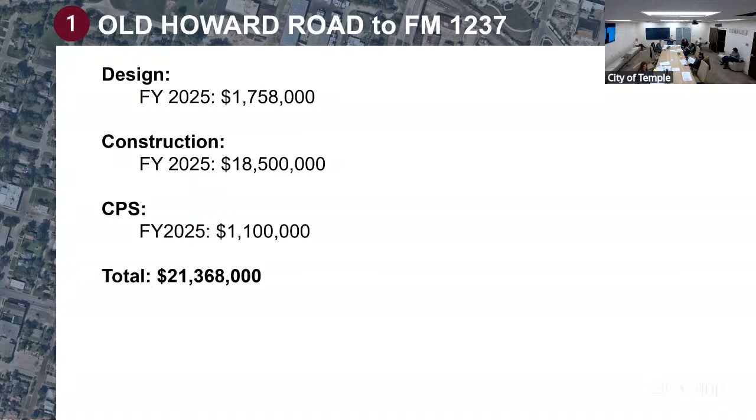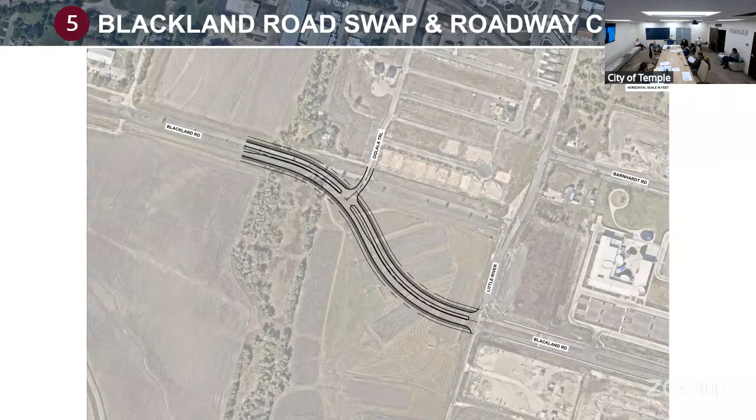These two slides, David -- if there was a way to show these onto a single slide, it would almost be better. I need that slide. And then this next slide just shows how the two connect, all right? And you guys, we're working on this -- this piece is a work in progress, right?

Then the next one, I don't think you're gonna find this, so we ditched it. Here's the deal: I like full disclosure and telling the boards that this might come in a quarter rather than just bringing it, so I can ditch this slide. Personally, I like it when you give a little view of everything, so I'm gonna have a better picture. You're gonna add a slide for that.

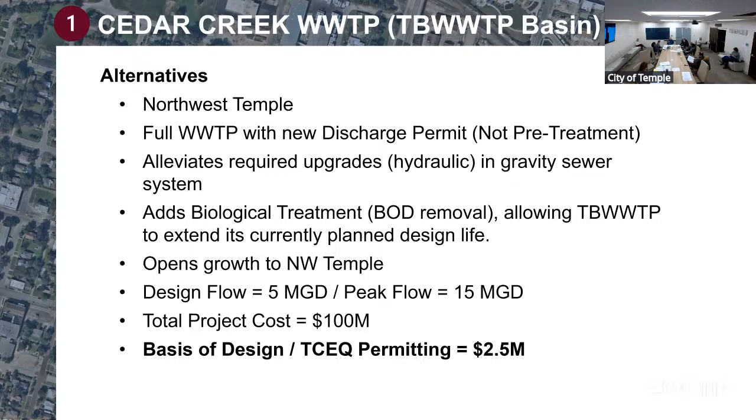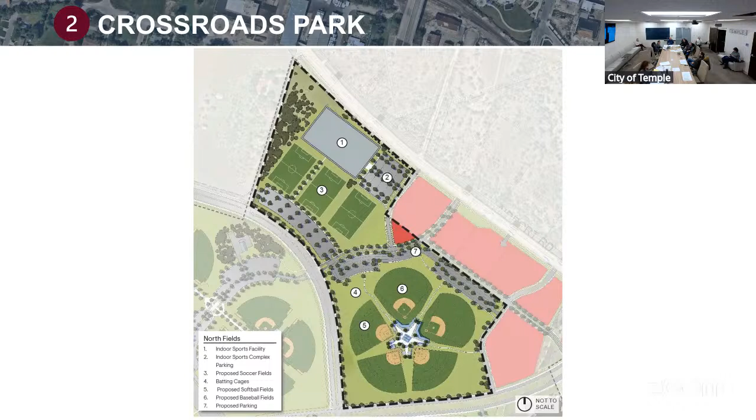This is where everybody left, right? So then we went to this. I got this in with everybody, which was just to let everybody know that we're trying to get design dollars to do number 7. That's where we lost everybody.

This, they haven't seen, and this one gets pretty foggy. But I can clean that up, and we're not asking for any dollars on this, but I will tell you, they're in active discussions with the city manager as to—

we're about to activate this, and is there—tell us what you think, or forever hold your peace. So this, I would like to present to the full board: hey, you guys, I don't know if you knew this, but John Wilder's opening, we just spent dollars to make sure the grass on one side of the building looks okay. At some point they're gonna be parking in the grass over there, so we may want to look at trying to build this parking lot for $462,000, and then we're gonna have to spend a certain amount of design dollars for it to be prepared.

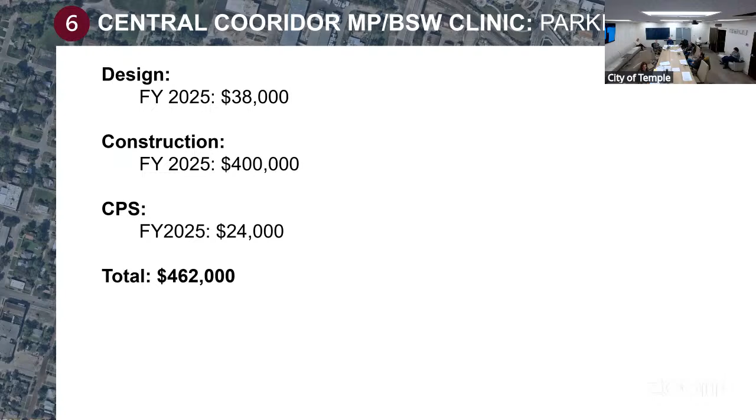Right, Bob, I still think we should. And they're gonna be opening this summer. But this is so confusing, right? And that's confusing. We're gonna clean that up.

And then on this, there is a master plan being done, and there are some right-of-way needs at $700,000 that we may want to help on for flexibility. There are dollars for them to buy a tract of land that's under contract here, and they have the dollars, but the dollars the city would use are less flexible, and you have to forever hold—it is parkland forever.

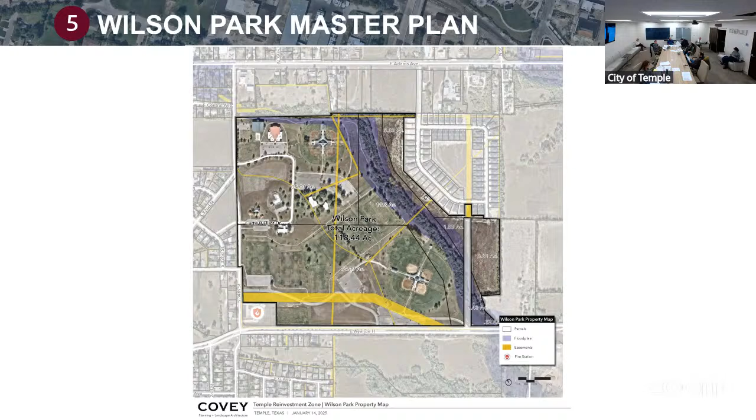To where if the zone wanted to be able to possibly take some of the land that's there and sell it, then we should fund the land and we could later get that money back. So that's sort of our discussion. We're in active discussions with the city manager's office on this master plan, on that purchase of land, to make sure the zone and the city combined have the most flexibility on that closing. That's all we would say on that one, right?

And then—that's a good picture, David. We drove it. You know, that's what we need on a couple of those other slides.